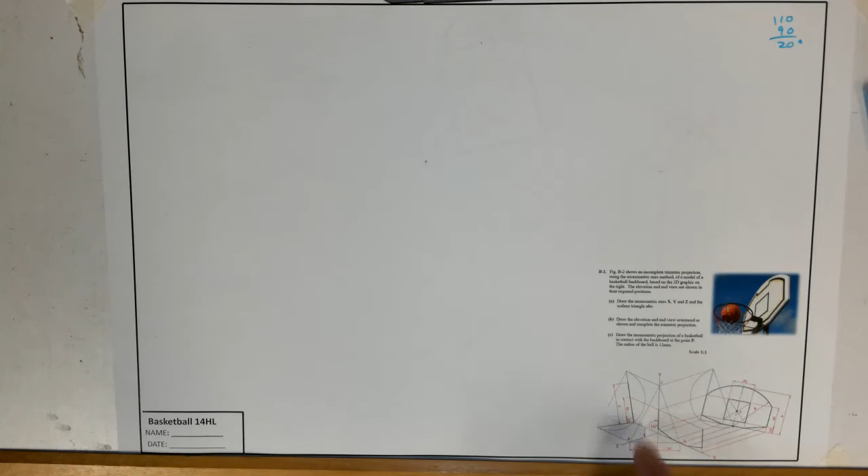So I'm given 110 degrees. Normally I'm given 120, and so you'll be able to figure it out from that. But what I want to do is I did my little bit of math up there. 110 minus 90, so I should put a minus mark, gives me 20. So that's basically what I'm going to set my adjustable set square to. So hopefully you can see that. That's set to 20 degrees.

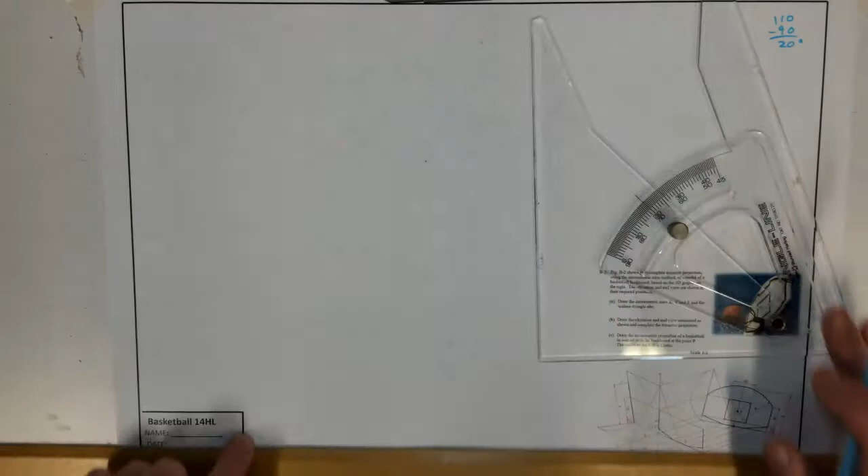So I'm going to start off by drawing the X, Y, Z lines in the middle. Some of you might start drawing the triangle. Don't think it really matters. Okay, I'm going to draw it this way for this one anyway. So I'm going to try to keep this up. I'm hoping that it's not going to make any difference. And I'm just looking at this view here. This doesn't have anything sticking out, so I'm going to keep slightly more to the left. So I'll try this position, and then at the end I will mark what worked out.

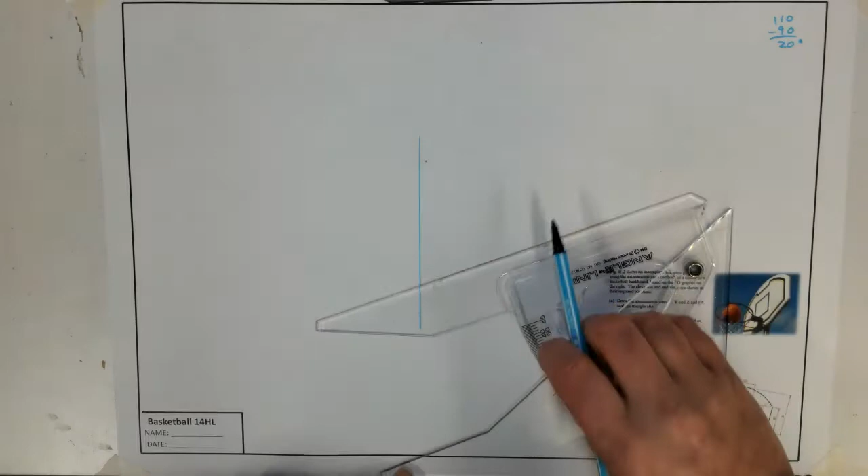Okay, so this is still vertical, so I'm going to draw this like this. This is the angle that I know, and let me see, I'm just looking at where it's going to project up, so I want to actually move that up a bit, maybe about here. So I probably shouldn't have put that down as far. Okay, so, and again, if we check that there, that should give us the idea that it's correct. So hopefully that'll work out. So I'll just take my little bit of Tipex and just maybe mark this just for the sake of making it a little bit less confusing. So I'll check if this works, and I can give you the position at the end.

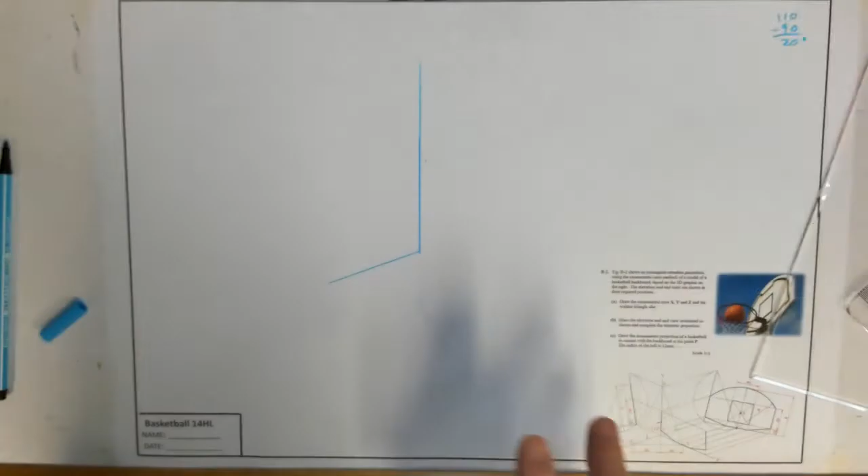Obviously, when you're doing this in an exam situation, you have a twice as big a page. You'll have an A2 page rather than an A3 page. Sorry, the focus there is refocusing, and the other side of it is you won't have this little graphic. You'll be working off the exam paper, so it won't be as bad. So I have that degree there.

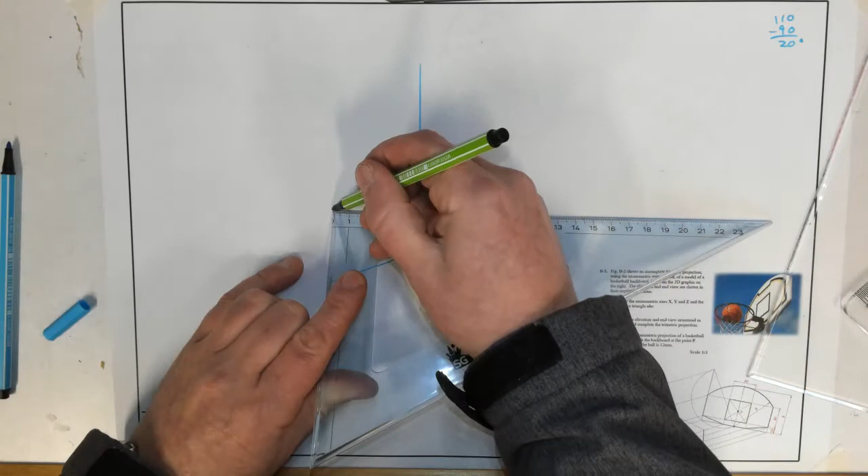Now what we know basically is that we're meant about 50 millimeters here to find point A. So what I'll do with my green marker, to keep it the same color, I'm going to measure out 50 millimeters here. I'm just going to put a little dot, make that a little bit darker so that you can see it, and I'll bring this down and I'll mark that off that. So once I have that, I know that's my point, what they called A. And I'll just write the letter on it just so that you can see it.

So what I know now basically is from A straight across to there will be 50, and we need to bring it further across and get another 40 across. So that would be 90 from A. And I'm marking point 90. And what I know now is that if I draw that back to that, that's giving me point B. And that's the other angle.

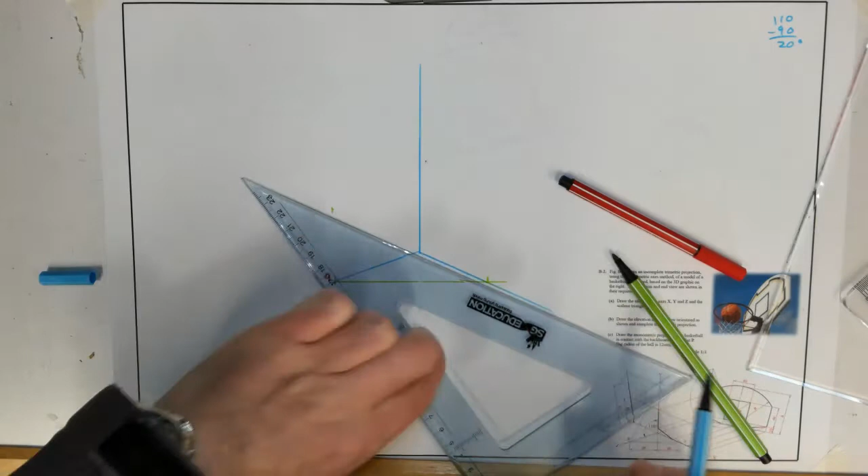So just be careful in this question. Sometimes people might think it's a dimetric question, the two angles are the same. This angle and this angle, they're not. They're two different angles. So there was B. So I found A, I measured out 50 straight across. This is 40 straight across from the center, or you could say it's 90 from A.

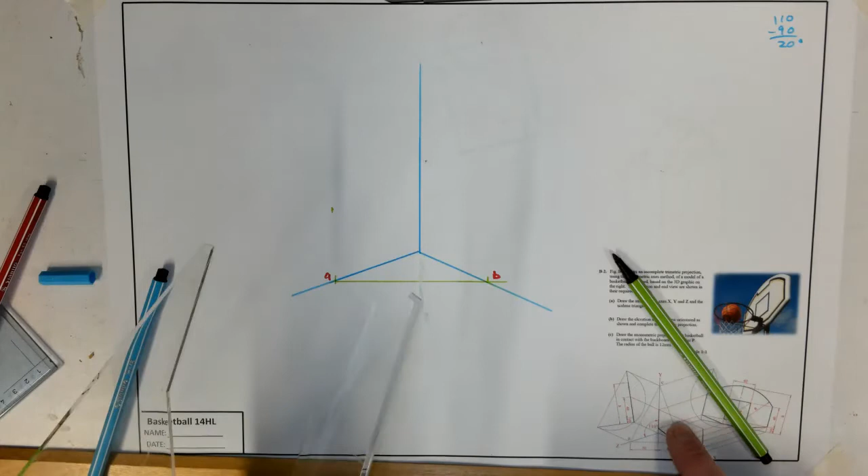And what I want to do now is I want to draw, sorry, not vertical lines, perpendicular lines. Now if you look here, this line here is perpendicular to the line coming out here from A. So that means I can use the set square this way.

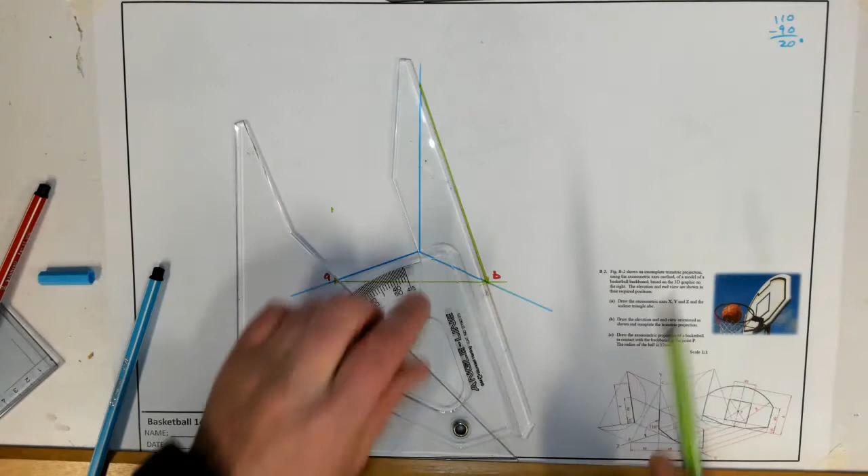Okay, and I can then join, that gives me Z, and I can then join that. The other way I should be able to draw this is that if I set my adjustable set square to the line, what do they call it, the line X. So if I set my set square to this, I should be able to draw that because that should be perpendicular there as well. But I'm just going to leave it as is for the minute.

So what I'm going to do is I'm going to start with this side because that's the angle. So this side here is the angle that I've already set my adjustable set square to. I'll need to reset it again to do the other side. So they used, what do they use, sort of a pinky line to bring it out. So I'll keep it the same. So bring that out. And we'll bring that out. So again, make sure your T-square is in tight.

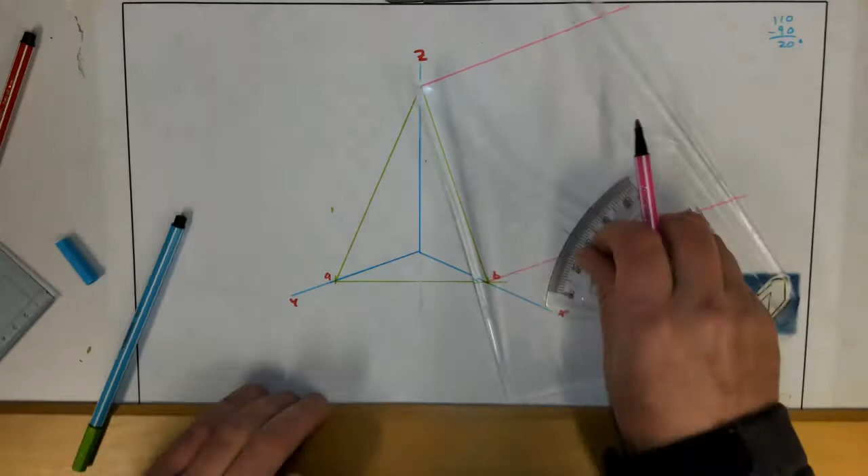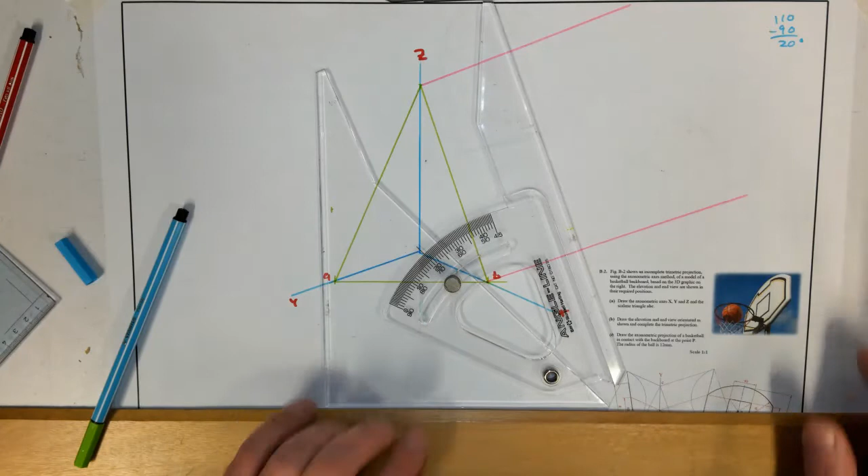And that will help to fit it. So I'm just looking at how much this sticks out this way. But it looks that if I draw a line here, there should be a good bit of space. It shouldn't actually matter for these lines. It may come across this, but sure, that's just the way it's going to go. So we'll keep the colours consistent, and we're going to draw a green line around here. Okay, so I'll take my compass and I will bisect. So I'll set it over halfway.

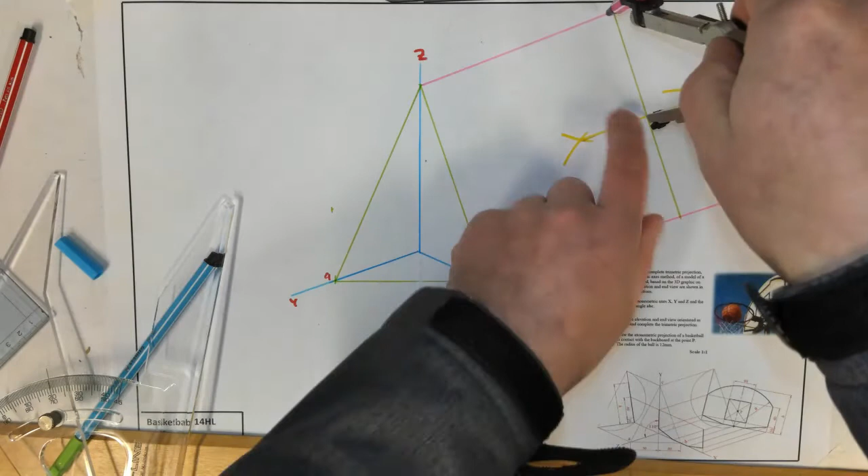Now, what you'll notice here very clearly, what colour did they use? They used a pink for drawing the semicircle, is that this blue line does not hit in the middle. So when you're doing an ordinary level question, so far anyways, they've always given 60 degrees or equilateral triangles to start off with. So when this hit, it also matched the bisection. But at higher level, it won't. So that's why we need that bisection.

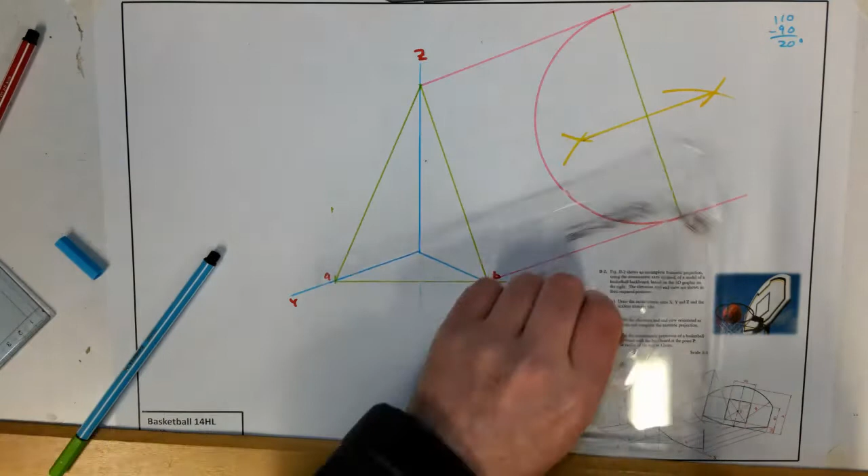So in order to find this point here, the point at which we draw the rectangle, right? So basically this point here, so that we can set up this view, we need to now extend this out. Okay, so we'll extend this on. And where that hits there, that's my point for these two blue lines. Okay, and that's basically the angle at which that elevation will be drawn. So now I can join that point there, and I can join this point to here. And we just extend it on because they extended on.

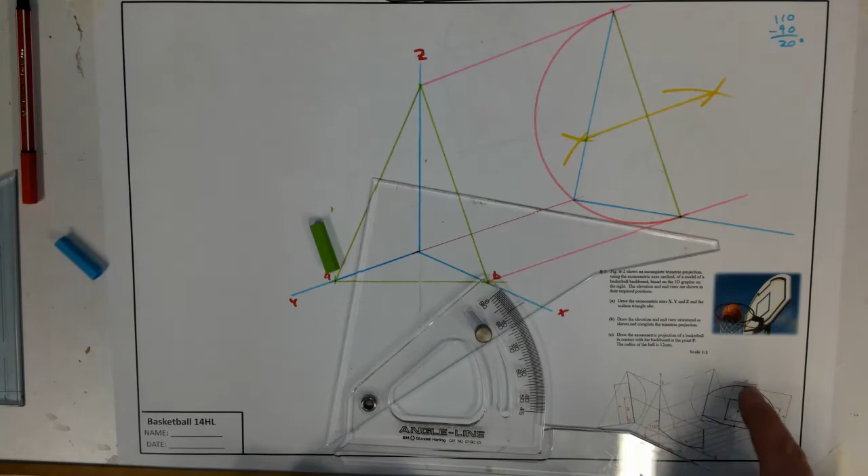So I think I'm finished with my 20 degrees for the minute until I start to project back. But for the minute I'm finished, and I want to draw all these lines parallel or perpendicular, at least the majority of them. There's one or two sloped edges. So I'm going to start with that. Now the first thing I'm going to look at is here. This is the center line. The center line lines up with this point. So I'm just going to draw it lightly up the way, just to make it a bit more obvious for you. So again, we need to look out for pointers. So long dash, short dash, long dash, probably up way too high in this case.

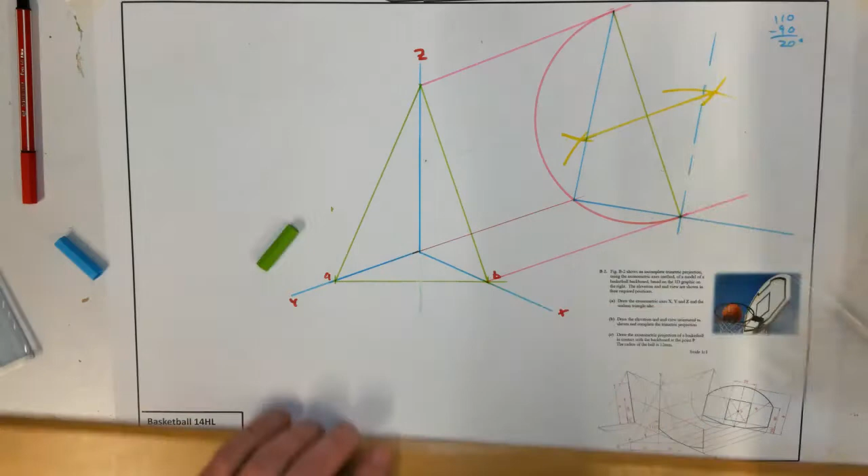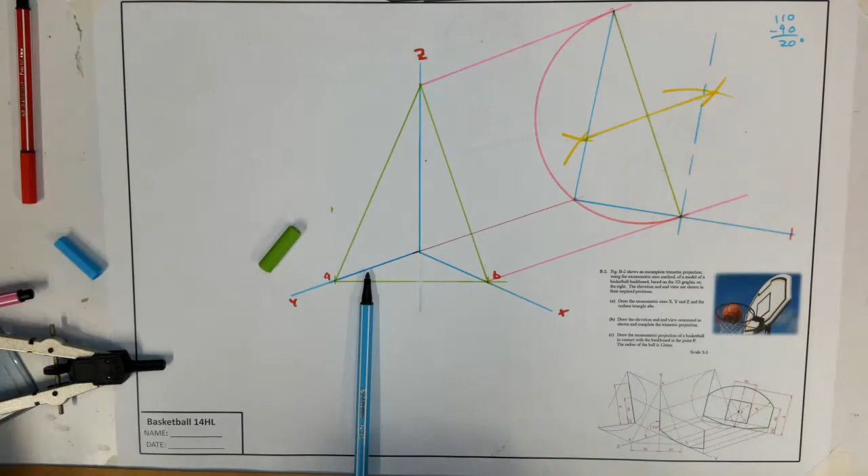But I now know half of this. So what I can do with my compass is I now can figure out, well, what's the full width of the basketball net. So the basketball net comes out as far as here. Okay, so that's the first bit. The second bit is, well, we know a 10 and a 40, and we know a 40 from the center. So we'll start with those. So if it's 40 from the center, it's 20 either side. So we'll measure out 20, and we'll measure out 20. And then we know we have a 10 and a 40 up here. So 10 and then a 40. And we'll use our adjustable set square.

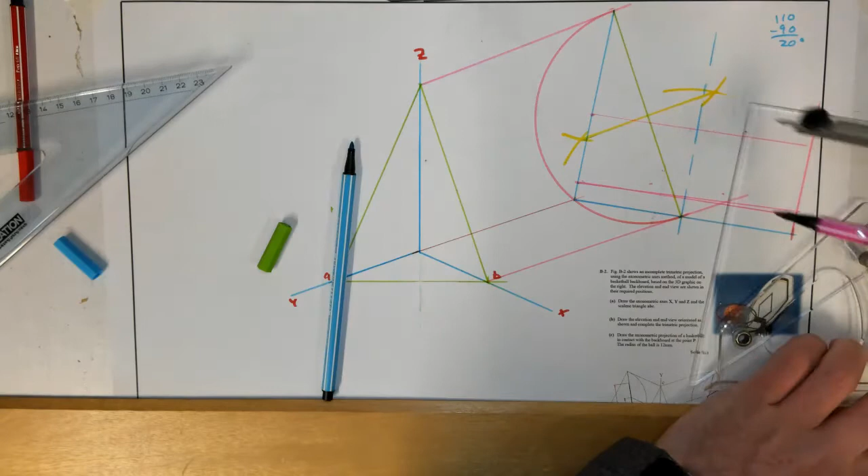So something is a little bit off. Sorry, I just wasn't holding mine. I didn't do it 100% correct. Okay, so may just be my set square. So bring up this. These are my 40. Bring up this. Bring up this. I'll fix up that little bit with my Tipp-Ex in a second. So sorry, my adjustable set square is just a little bit off. Let me do that line.

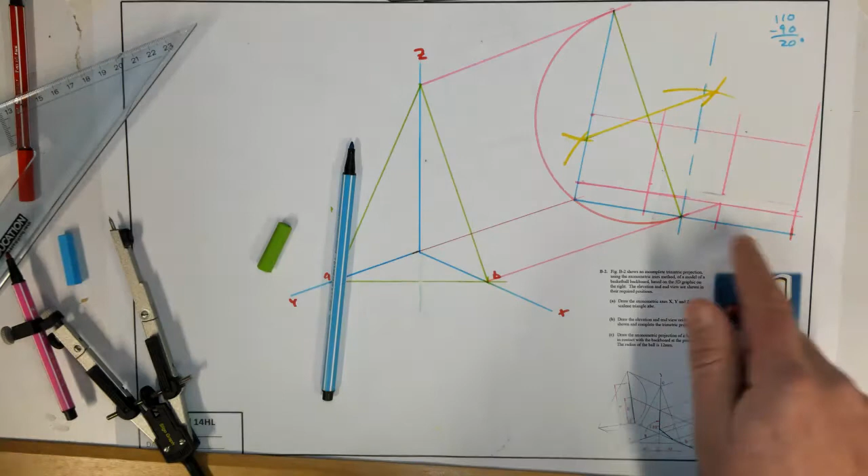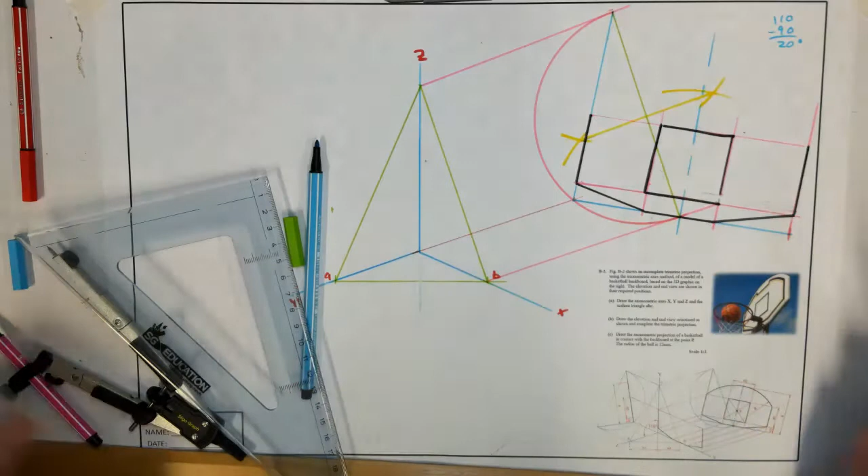But you can see there I started to construct, I suppose, the bit that you shoot at. I don't know exactly what it's called, the square that you shoot at. Usually try to get it into the net. So we'll heavy in these bits here like so. I'm happy with those. We're happy with my 40 mil. We're happy with my backboard part. I'm just trying to avoid the little bit of Tipp-Ex that I used so that it doesn't get on my marker. Okay. And then they found the center point, so we may as well mark that in too. It may be of use, I think it is, for the part C.

Okay, and then they drew the radius. So the center point for the radius was here. So I'll just change to my black marker now, so that I can draw all that in one go.

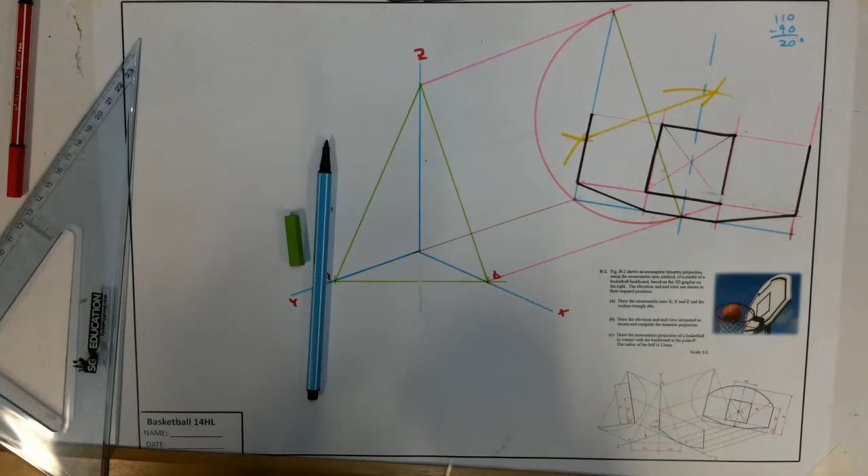So I should touch both sides. And there we go, and there's this view done. Well, I still have to bring back some lines, but for the minute, I think we're happy enough with that.

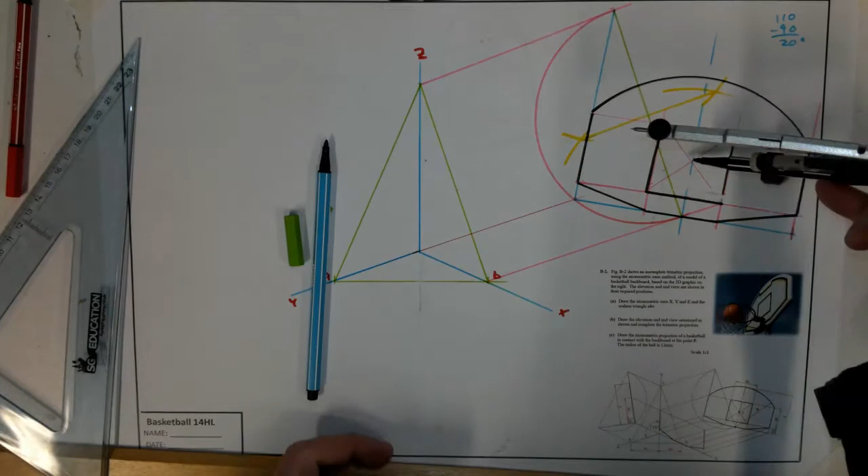If you want, we can heavy point P. It's going to come of use. Right, and we're going to start doing the same on the other view, the same type of method.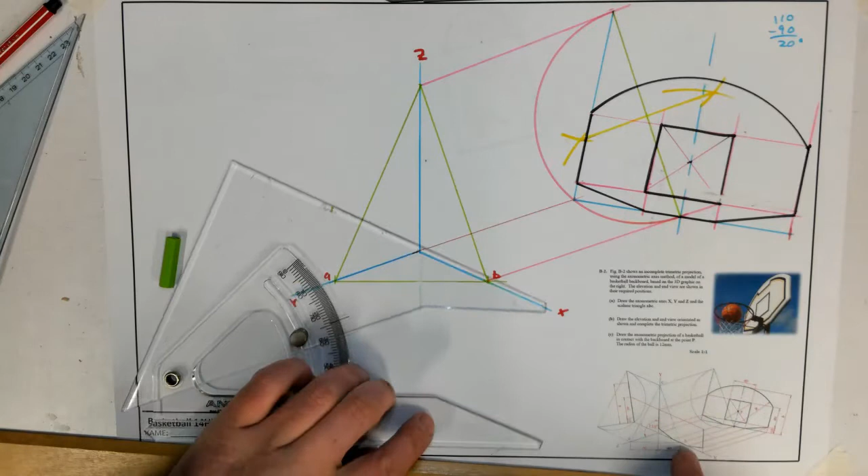So what we need to do is set our adjustable set square back to X. So it's not 20 degrees - it actually looks to me that it worked out around 25 degrees. It may not even be an exact degree, so we don't know that from this. We've figured it out by measuring out to 40. So we're going to take this set to the blue line, and again we're going to start projecting these out.

Okay, we're going to pick a random distance, so I'm going to pick here. Just in case there's any confusion, this distance is completely random. I don't want to be too close to here that this wouldn't intersect across it, but that looks fine. I'm going to set our compass to over halfway.

Sorry, I can't find my yellow marker, so I'll just use a red. You can see the lid of it, but I can't find the actual marker.

So this can't be done at the same time as the start because these are two different angles. Sometimes you'll get a question where it can be, but in this case it can't. So there's my bisection, and again you can see the bisection doesn't line up with the line X coming out to meet it.

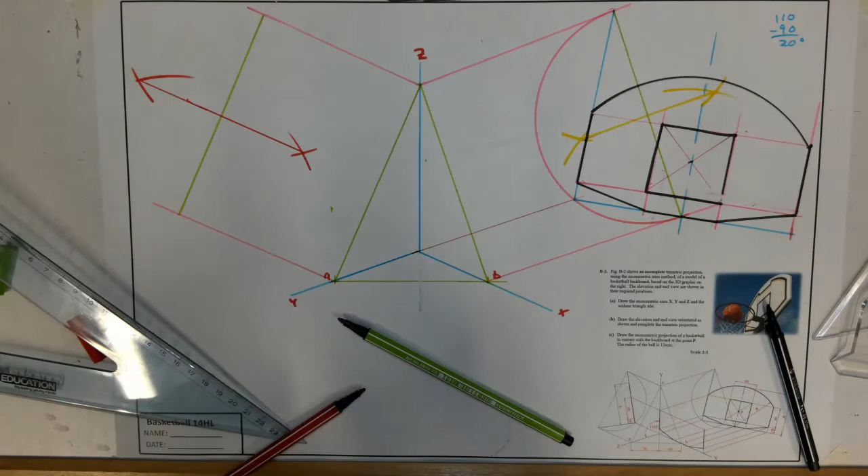And draw my semicircle. And then we'll join the corner. So I'll use a blue. Oh, sorry, let's extend this out first to make this.

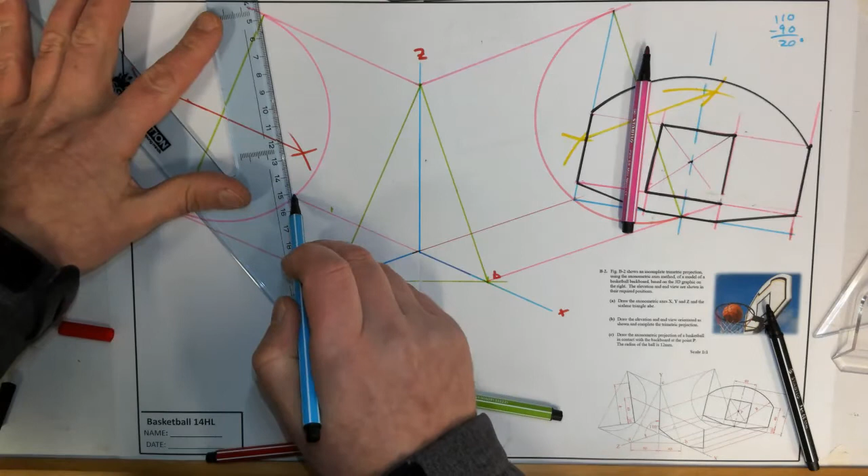To find the exact point. So once I found this point here, I can join it to this view. And I can join it to this point, or sorry, to this point and that point.

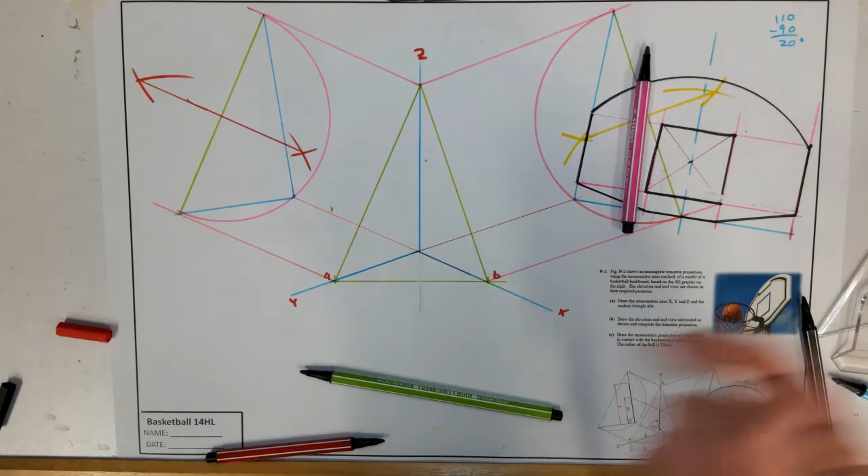Okay, so we now have to draw the end view of this. Now this height, or this end view here, is basically just a line. So they're assuming that this basketball net has no thickness. In real life, obviously it would - this one looks to be made of a piece of plastic or something that's rounded. But they're saying we're going to give this no thickness, so that's why it just looks like a dark line. Sometimes it's hard to see the difference between the blue and the black line.

So they give us the 10 and the 40, so they're the simple parts, and those points are going to be needed. So I'm going to mark them in just so that I can see them - 10 and 40. So I'm going to need those 2 points.

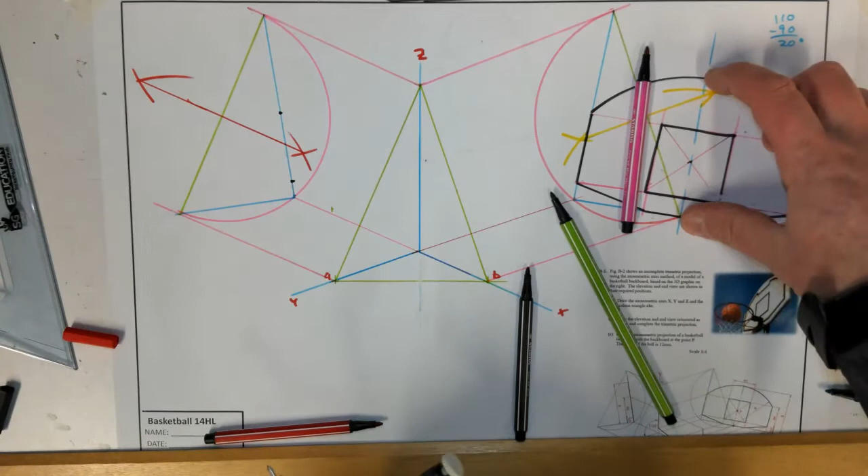But in order for me to heavy the whole thing, I need to take - now you need to be careful here - it's this distance here, it's not, well that would be the same as the radius. I was going to say it's not the same as the radius that we set it to, but actually it would be, because they use the same center point. Okay, so that distance there, that's the actual real height of it, and we'll mark that.

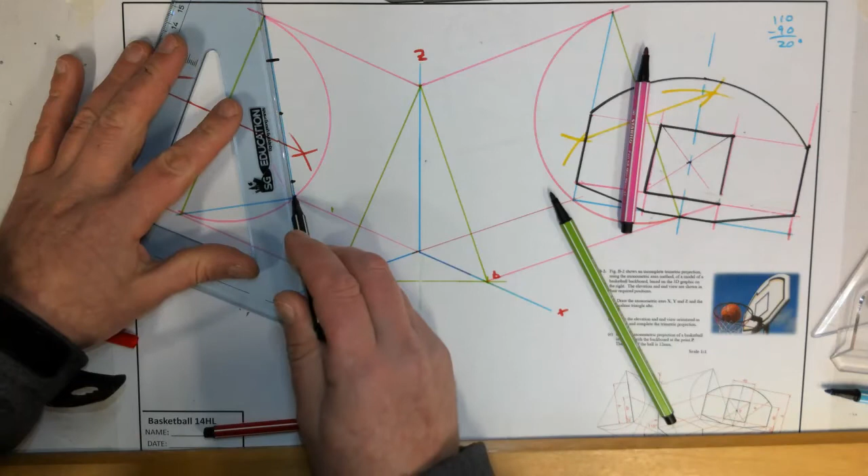Okay, and we'll heavy just that in. So hopefully you can see the difference between the blue and the black line, and there's my 10 and there's my 40. Okay, so we're now going to construct in 3D what is down here.

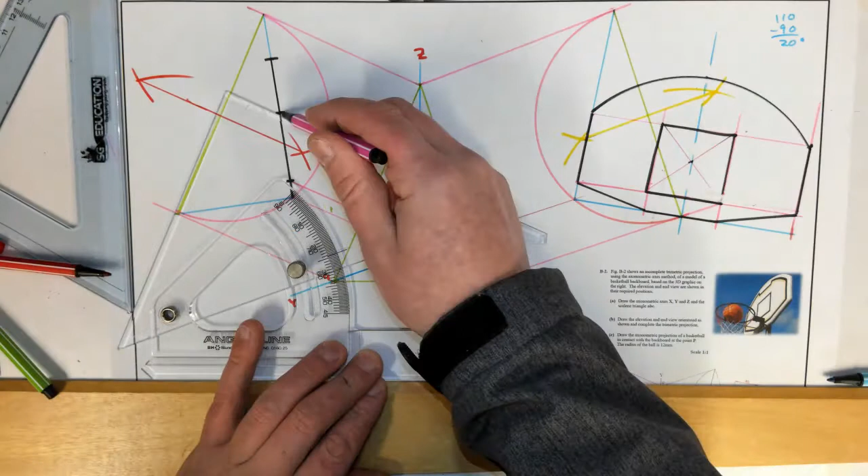Now, the easiest thing in this case is to start bringing down the points at this angle, because this is the one that I have. I'm actually going to split the curve in a second, so I'll come back and reset the two angles. But what I want to do here is bring this down the full way. I think this is going to go a bit onto this view, but it'll be fine. The reason for that is so that I don't have to reset this.

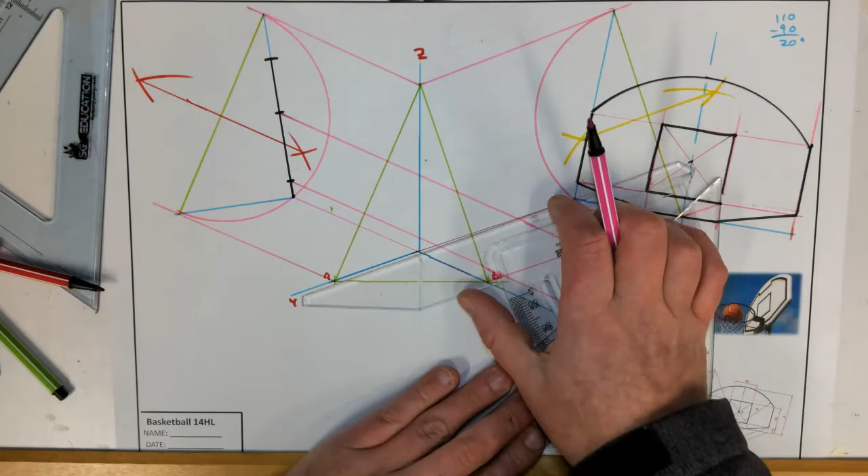Now when I go this way, the most important thing that I do is not keep it at the same angle. I have to bring these down at the original 20-degree angle. So the big importance of this question is that you're using two different sides - you have to keep adjusting the adjustable set square to do both. So, oh no, that one point there is actually not of any real use.

And I'll just bring down the corners for the minute. So what I've done, let's see if I call this A, B, C, D, E, and F. I brought down one from each.

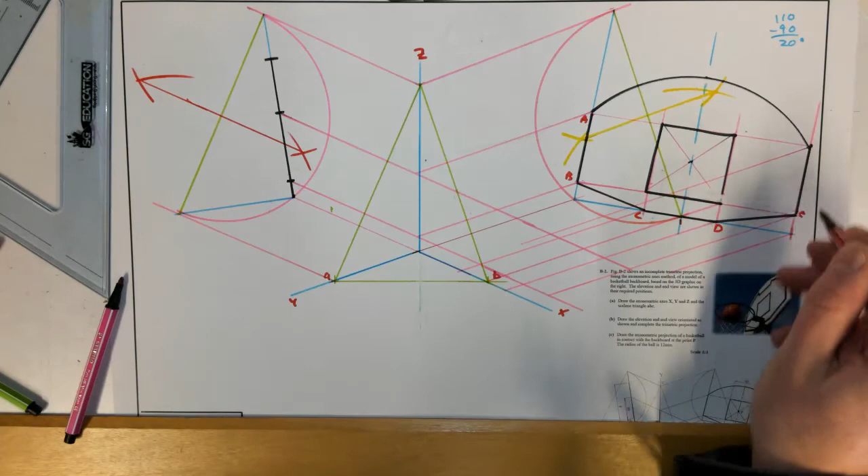And if you think about them here, C and D are 0 height up. E and B were the 10 millimeters height up. F are basically the 40 millimeters height. So this is A. A is the 40 millimeters height up. So we'll write A. B is here.

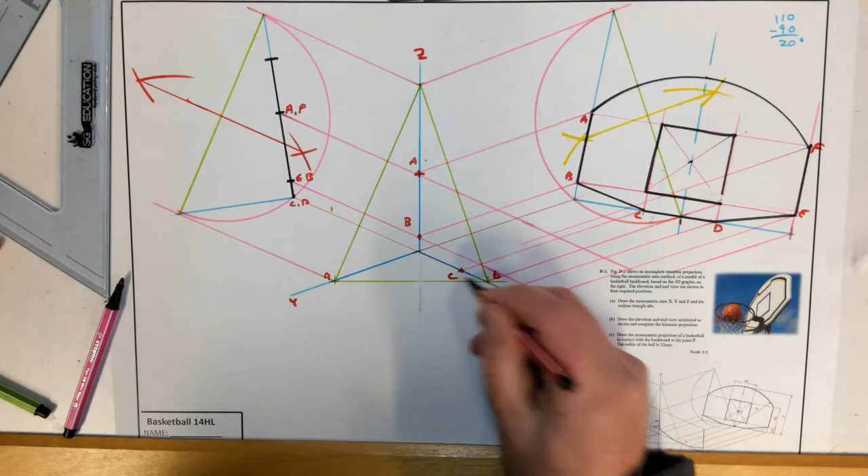C is here. So just be careful, be careful not to get confused with the B that was originally there. D is here. E is here. And F I'd expect to be above E somewhere there.

Okay, so I'm going to take my black marker. I'm going to heavy them because A went to B, went to C, went to D, went to E, went to F. In this view, it must be the same in the 3D view.

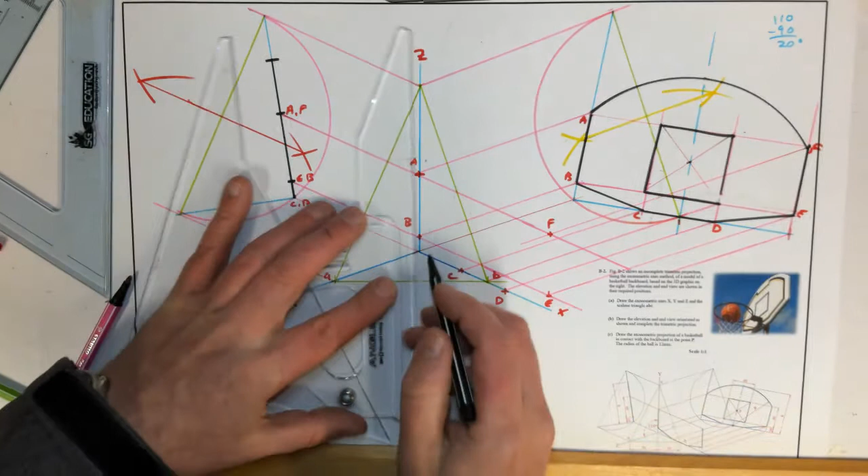Okay, so if you've done it right and you've used your set squares right, these should end up on the ground on the blue line. These ones, B and E, should be level with each other, and most importantly, E and F and A and B should be vertical from each other.

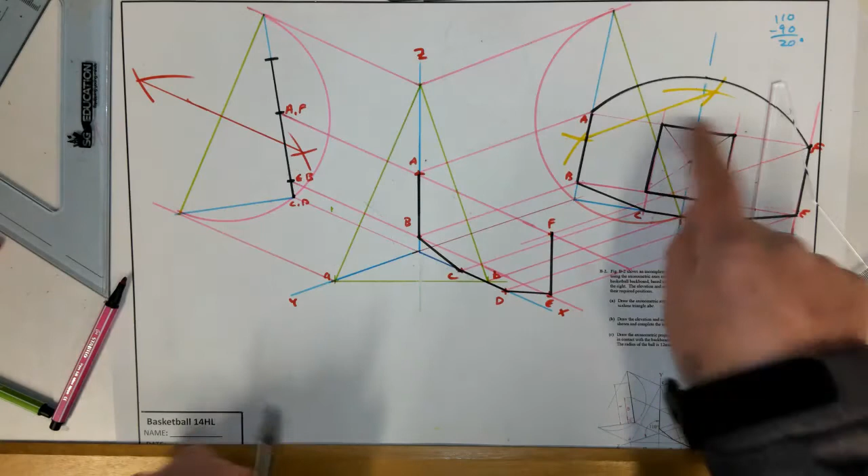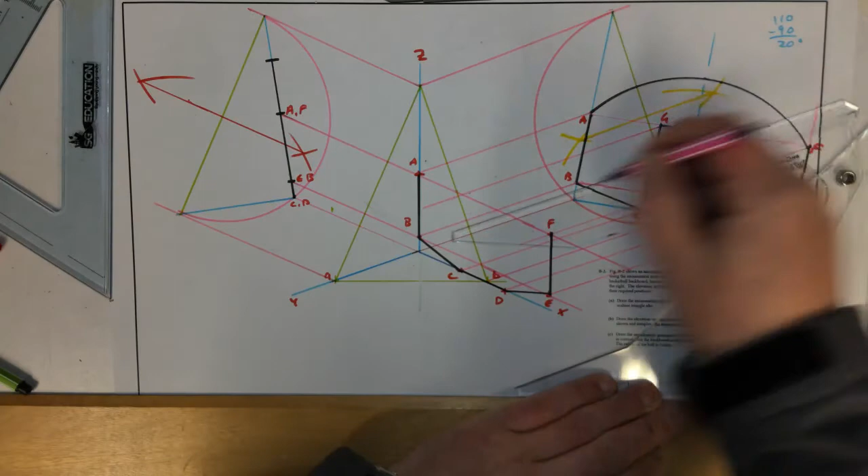So I'm going to work from this side this time, because it saves me going over to the other side and then having to come back. So they're sort of roughly brought down.

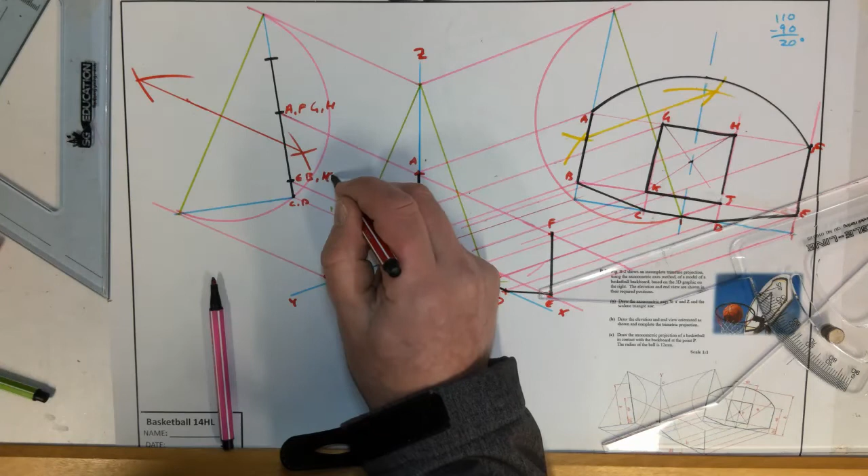Again, I have to look here. G is at the top, 40 mil, and H. And K and J are at the 10 mil above. So again, when I flick this around, I have to reset my adjustable set square.

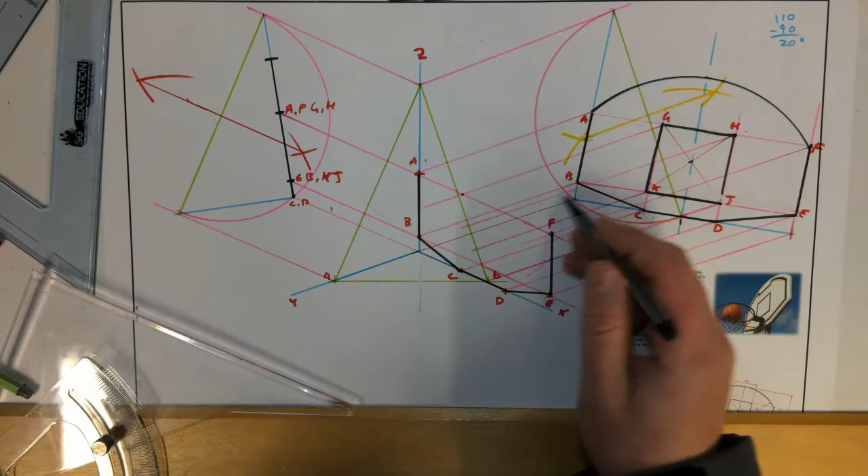Okay, so we shall... oh, they're already brought down actually, silly me. So G is there because they actually have to be on the same height. H is there. And did we bring this one down, K far enough? No, needs to go a little bit further.

Although actually it should be straight below the other one, and J is there. So you can see my various points.

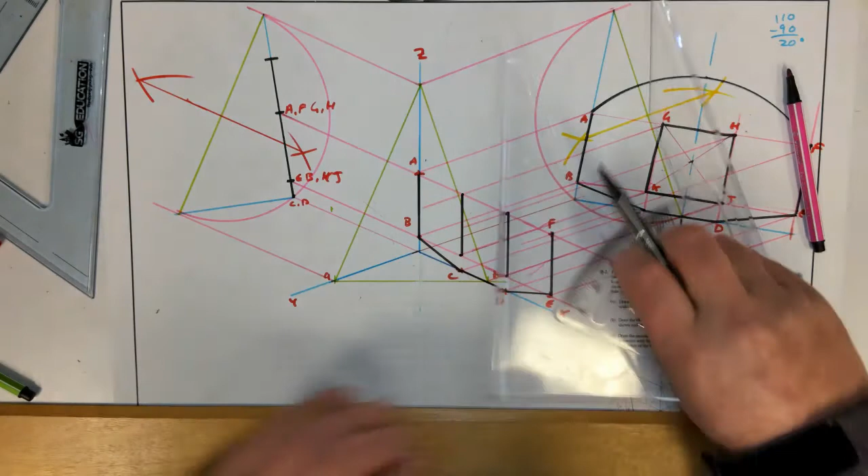And again, I'm going to draw the crosshairs. I'm going to use maybe a different colour of red because that point may be necessary. You'll see why in a second. Okay, so draw my crosshairs.

So the last bit now that I have to do is basically have to get my curve. Okay, so it's up to yourselves how you split it. You could split into 60 and 30. I generally wouldn't. I generally take this distance and divide it roughly by 3.

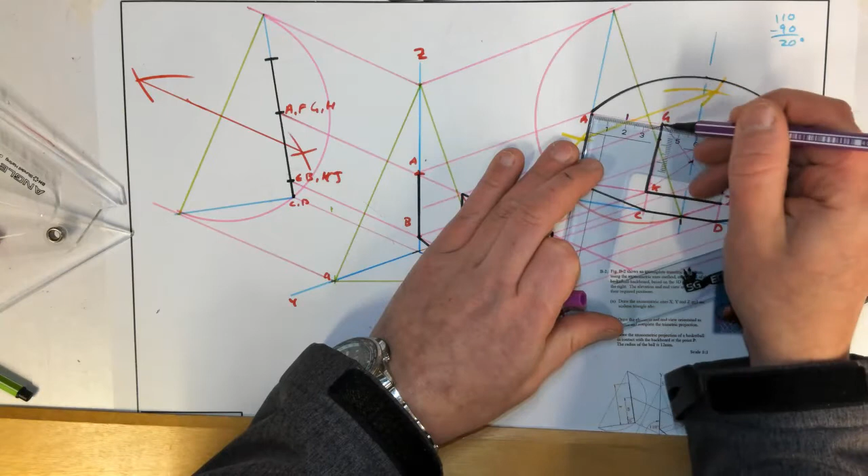And I might use maybe a purple or something different for the curve. So this measures out roughly 60 millimeters. Okay, so let me see. I'll try this purple. Maybe this one here might be too dark, it's sort of a pinky purple. So there's a 20 and there's a 40, right?

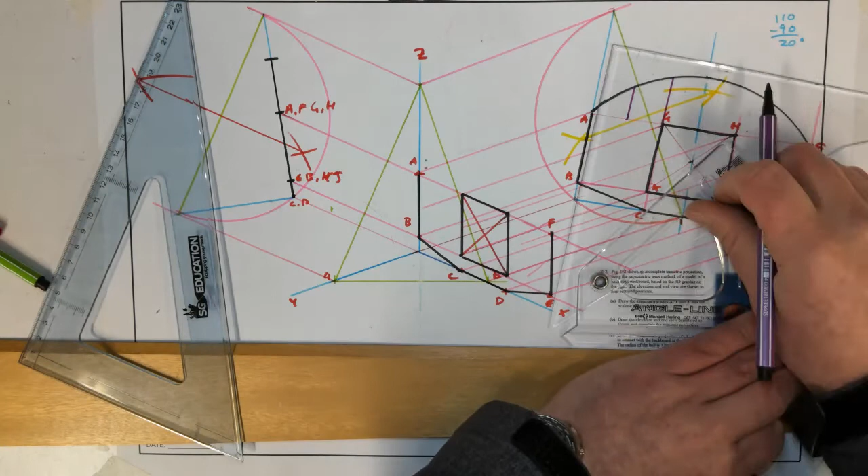Okay, so I now need to set this back to this angle. Okay, so I'm going to label these. I'm going to call it, well, I have A already. I'm going to call this 1, 2, 3, 4, 5, and I have F. So basically it's going to go to A to 1, 2, 3, 4, 5, and to F.

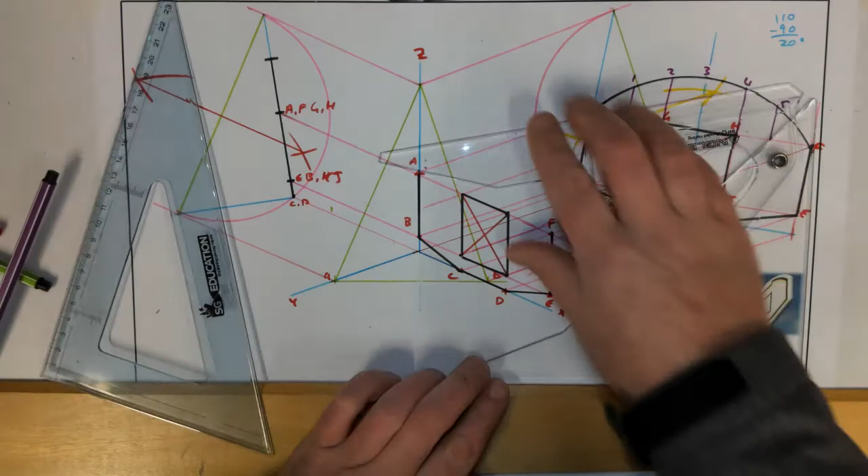So what I'm going to do is set this back to the same angle that everything's being projected down at. And then I'm going to bring these down. So 1 is going to be somewhere there. 2 is going to be somewhere there, 3 is going to be somewhere there, 4 is going to be somewhere there, and 5 is going to be somewhere along that purple line.

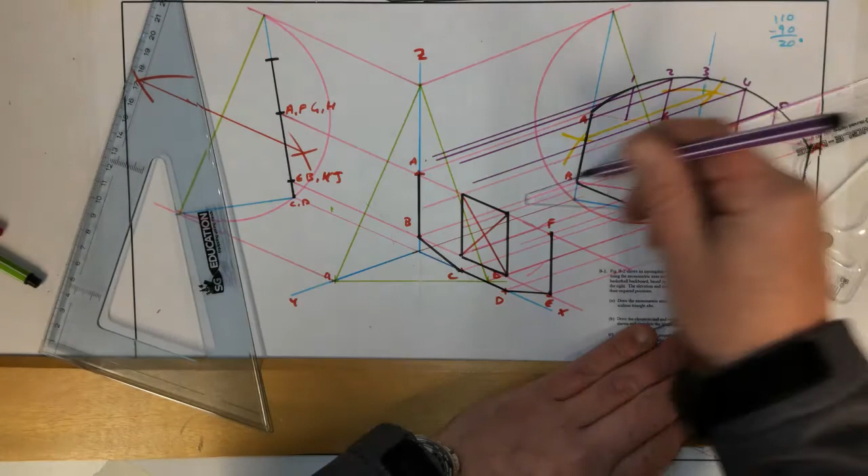Okay, so the last thing that I need to do is, well, what height was 1, 2, 3, and 4 for this view? 3 is handy, 3 is the very top. Okay, and the only reason I didn't bring that down was just to help to avoid a little bit of confusion. So 4 is this height.

And that's also the height for 2, because they're the same distance out. And then 5 is this height. So basically 2 and 4 are this height, and 1 and 5 are this height.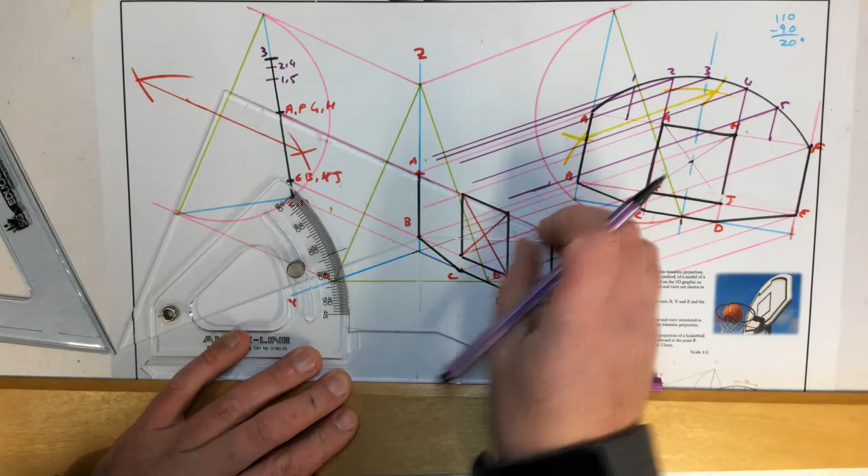So the last thing I'll do is I'll take my adjustable set square and set it back to this angle here that all these will be projected down at. 1 and 5 will go across that, 2 and 4 will go across that, and 3.

So again, I'll just carefully mark them. So where 1 and 1 crossed was basically this point. Let's see, I'll have to use a darker colour, I'll just use a black. Okay, 2 and 2 crosses this point. 3 and 3 crosses this point, which should be about right because it should be roughly perpendicular from there. 4 and 4 there, and 5 and 5.

So if I want to call it 1, 2, 3, 4, and 5. So what I'll do now is I'll sketch that in.

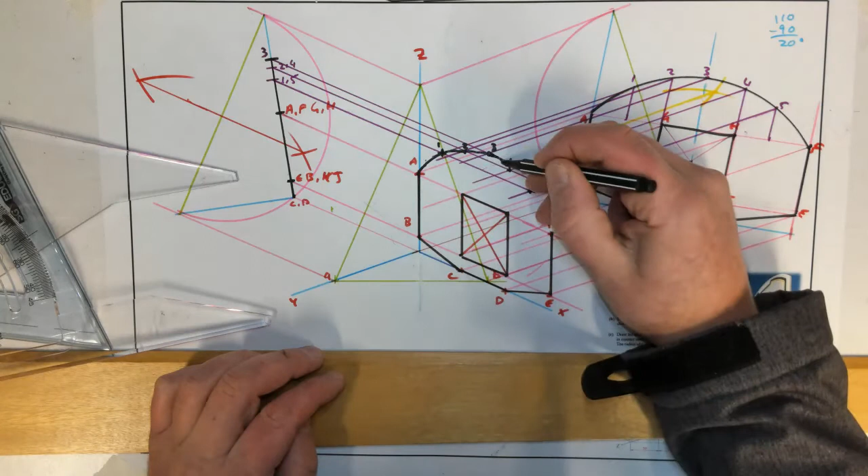And there's my question, or that part of the question completed. There's no thickness, so I don't actually have to add in any depth to it. Okay, so the last bit then.

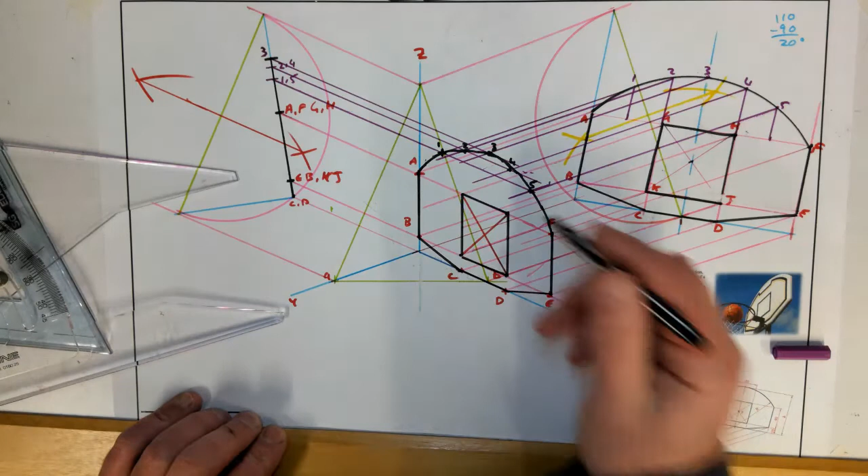Draw the axonometric projection of a basketball in contact with the backboard at point P. The radius of the ball is 12. So this was the reason for this point here, point P. So what they're saying is a ball is touching at that point, and they ask you to draw it, and I'm assuming we're going to have to draw it in all three views. So it says the radius is 12.

The first thing you could say, well, if it touches, if you wanted to draw this, there's no reason why you couldn't draw it in this view straight off. So you could set your compass to 12. If you're drawing relatively small radius circles, make sure that your two points are level. 12 can be a difficult enough one to draw because it's on the smaller side.

If you have a circle template alternatively, you could draw it, but just make sure that you're looking at the number for number 24 with the circle template, because they tend to be in diameters.

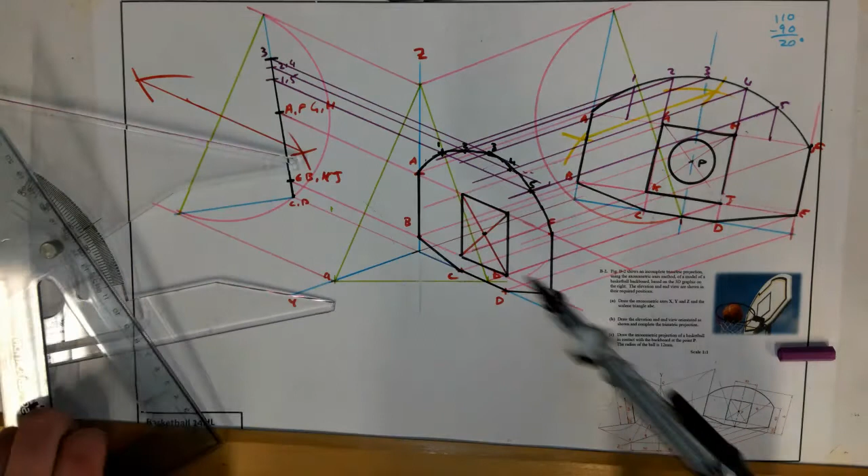That's the ball there. And what most people do is draw the ball here as well, and then they forget about this view. You have to remember that when you're looking straight on, the ball will appear in the same position. But when you're here, the ball actually isn't going through this, it's just the far side of it is touching this.

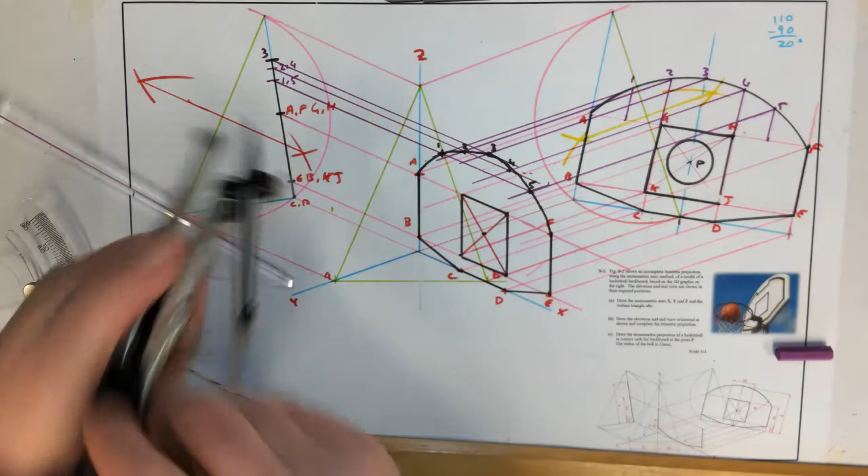The easiest way to explain that is in this view. If I was to draw the ball here, I wouldn't draw it as if it's going through, I would draw it as if it's touching at one point. So what point is it touching at? Well, if the backboard is 40 mil, it must be touching halfway down, because we split that in half.

So we'll measure 20. The other alternative way I could have done this is I could project this back up here, and that would also be it. But this is a slightly quicker way.

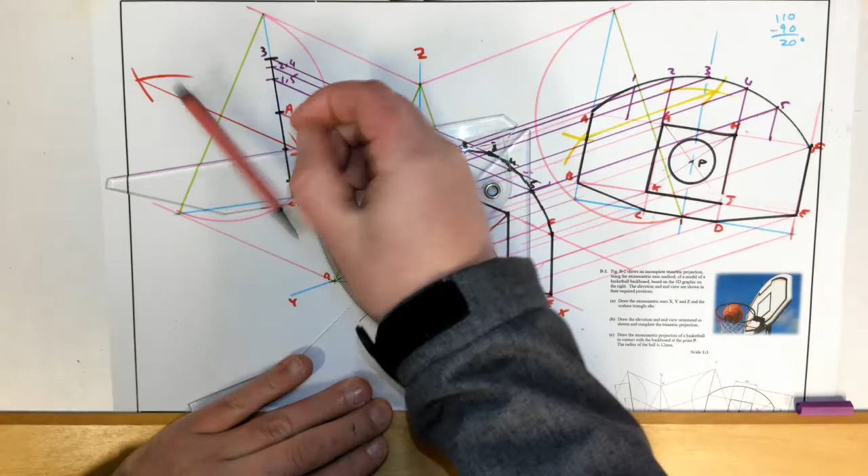So I'm going to set my adjustable set square to this angle, and I'm going to draw a line out here. Doesn't matter the distance for the minute. I have this set to 12.

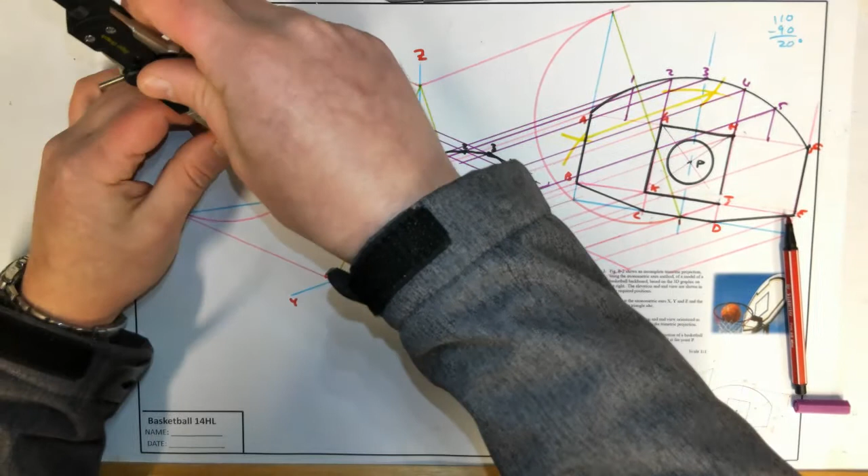So there is what the ball would look like when it hits, if it hit perfectly in that center. Okay, so what I need to do now is, I should have actually clearly marked the center of my, that's it there. I need to bring down that point.

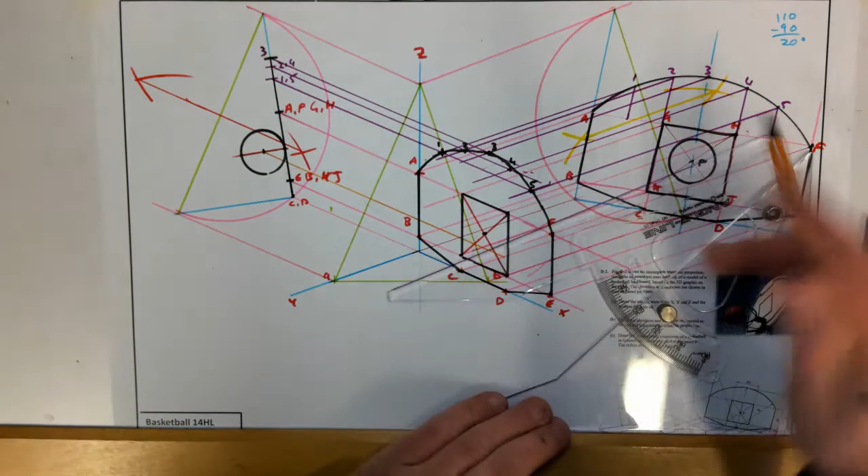So let's use a different color that I haven't used, orange. Again, it's critical with these questions that you keep getting used to adjusting back. It's very, very simple to forget to adjust back the angle to whichever one it was at. So that's that one. That's this point projected down. So there we go.

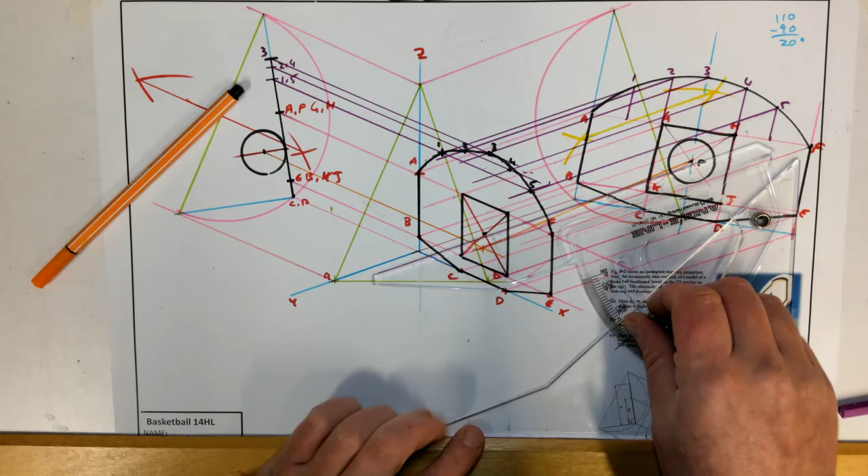Oh sorry, I'm just after saying exactly the opposite to what I did, and I was actually wondering because it didn't go through point P. I forgot to adjust it back to this angle. Yeah, that makes more sense, because it should actually go through that point there.

Okay, so I made a mistake there, in that I forgot to set it, but I suppose this is a good example of how I can forget just as easily as you. So there's my point, and there's that. So hopefully that shows up.

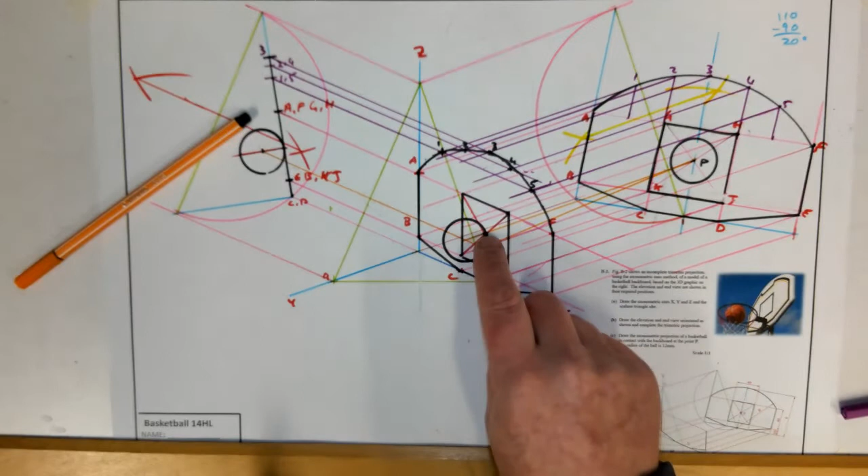So basically the orange point, if I was correct, should have come through the center point here, and that's basically the basketball. Okay, and then I suppose we could lighten that in, and we could Tipp-Ex it out, but I'll leave it as that so that you can see it. So that's the question done.

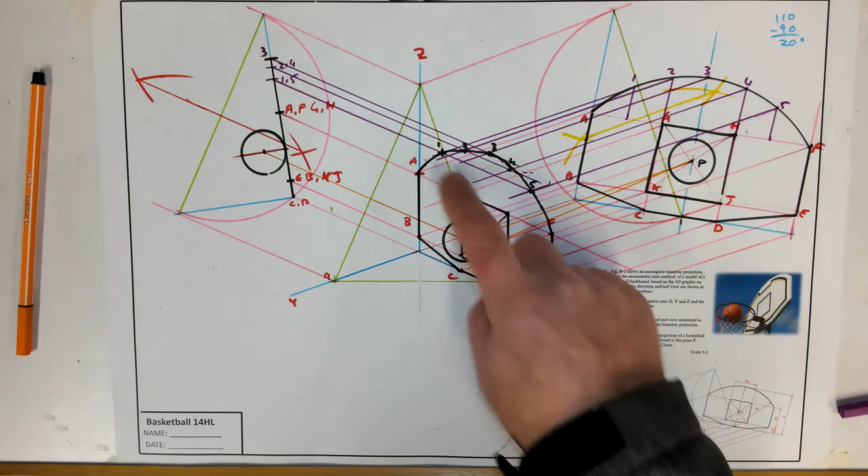That's all the 3 bits done, A, B and C. Put your name and date on it, and that's pretty much as complicated as it gets, apart from putting in a bit of depth on it. The only other thing they can really ask you is to locate exactly where a curve starts, which doesn't happen in this case because we have no depth. And the other thing that can happen is they can ask different parts C, so you'll see different ones like kicking a football and stuff like that.